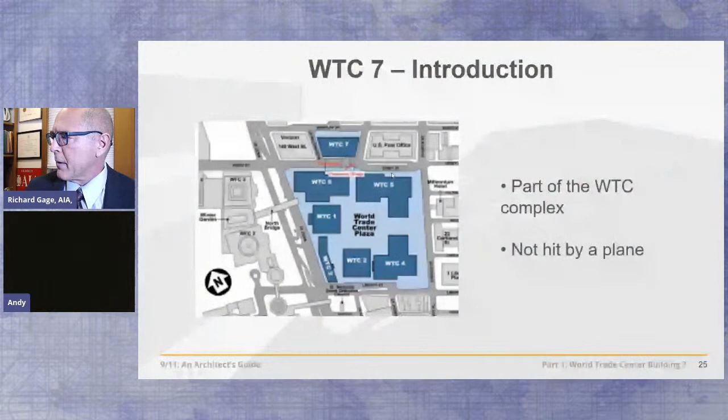The American Institute of Architects never even issued one bulletin on this incredible, historic, high-rise collapse that was unprecedented, as you'll see. It's 47 stories tall, easily the tallest building in most of our states. Emery Roth and Sons was the architect of record, the structural engineer Irwin Cantor. It was part of the World Trade Center complex, just outside the super block of the World Trade Center, but part of the World Trade Center nevertheless. It was about 300 feet north of the North Tower, and it was not hit by an airplane, and yet it came down, and we'll be looking at that quite a bit today.

So here it is standing just fine before the collapse of the Twin Towers, and then we have the collapse of the Twin Towers that morning, and you can see the building is still standing just fine. In fact, some of the debris did hit the building, and there were some fires that started, and those fires are said to be the cause of this building's collapse. So by official sources, we're going to challenge that hypothesis today. Some of the beams that were expelled from the North Tower did hit Building 7, but these are said to not have been a significant factor in the cause of this building's collapse. We'll find out what was.

First, let's look at the building collapse itself. Here we have the east penthouse falling first, as you see, and then about 6 seconds later, the entire building starts a symmetrical free fall collapse straight down into its own footprint.

Let's talk about the cause of this building's collapse from official sources. Here's Shyam Sunder of NIST, the National Institute of Standards and Technology: 'What we found was that uncontrolled building fires caused an extraordinary event. The collapse of World Trade Center 7 was primarily due to fire.'

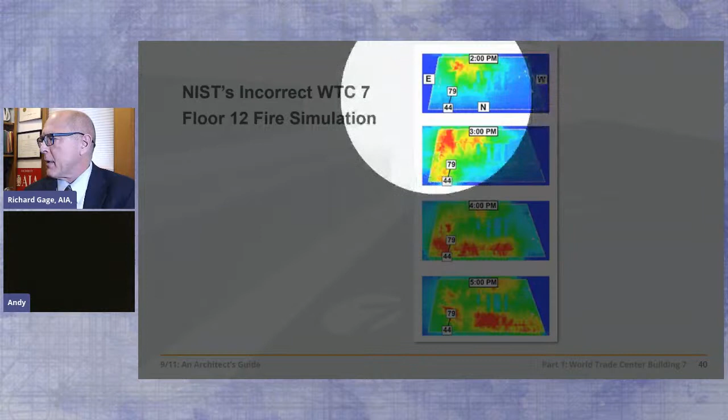So they levy an argument in favor of the fire collapse theory by creating their fire simulation. Let's look at it in some detail here. At 2 p.m., we have fires on the south side. They do move over to the east side at about 3 p.m. And then by 4 p.m., they're hovering around column 79.

Now, they also have them still hovering around 5 p.m. The collapse is at 5:20. So for over an hour and a half or so, they have these fires in the area of column 79. Now, that directly contradicts the understanding of fire protection engineers and NIST itself, which says such fires did not persist in any one location for more than about 20 or 30 minutes. Well, why then do they have those fires persisting in this location for an hour and a half between 3 and 5:20 p.m.? Because they need those fires to be persisting according to their collapse initiation theory.

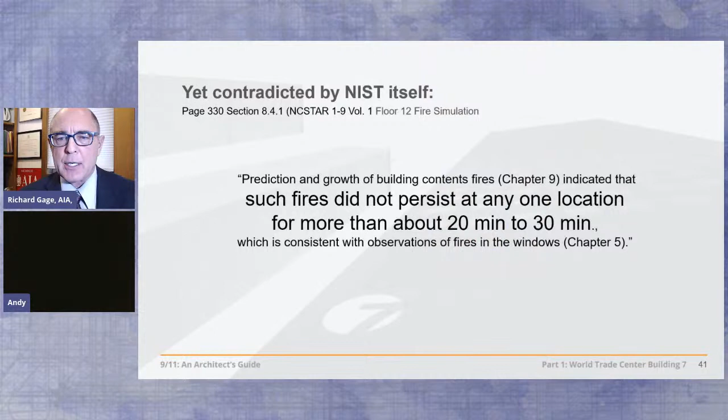But the photographs actually show that those fires were burned out on this floor, the 12th and 13th floor, which NIST focuses their collapse initiation theory on. Relative to those fires, they moved over, as you can see, toward the east—excuse me, from east to west. East on the left, west on the right.

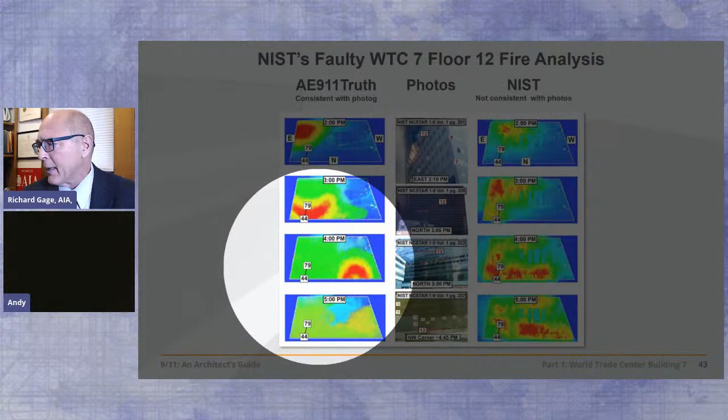So more accurate to the photographs that we see in the middle of the building, we have a fire simulation that we produced that shows on the east, those fires are burning about 2 p.m., and they move over about 3 p.m. to the northeast side, but they've moved on by 4 p.m. So for an hour and a half before the collapse of this building, those fires are gone from the column 79 area. And that's absolutely critical to understand, because that being true, NIST's collapse initiation theory, which focuses on what these fires actually did during that hour and a half, and specifically the few minutes prior to the collapse of that building, could never have happened.

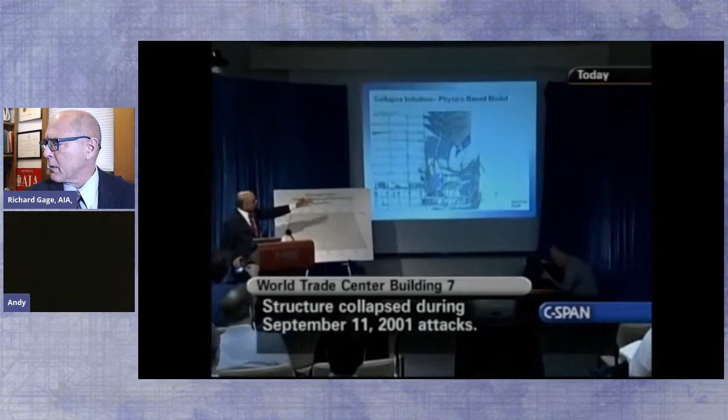Let's go back to Shyam Sunder of NIST. 'Our study has identified thermal expansion as a new phenomenon that can cause the collapse of a structure. For the first time, we have shown that fire can induce a progressive collapse. And you can see on the screen, the column at the very right is column 79. And that's the column that first buckles, causing the floors to come down, followed by a quick succession of failures of adjoining columns.' Well, that's the official story in a nutshell there.

Let's break it down. We have NIST saying that these beams expanded due to those fires, which they claim were active in this area for an hour and a half prior to the collapse of the building—expanding these beams, pushing this girder off of its seat on column 79, which causes floor 13 to fall on 12, 12 on 11, and so on for 9 floors, until the entire verticality of this column from floor 13 all the way up to the roof has collapsed due to unsupported length exceeding 9 floors. Well, none of that could have happened, for about a dozen reasons, which I'll tell you right now.

First, we have fireproofing on these beams. They could not have expanded. The fireproofing is 2-hour fire protection on these beams. That's a lot longer than any fire, even according to NIST, could have burned in this area. You can see the fire protection partially installed in this construction progress photo.

So second of all, they had to put all that fire, all that heat, 1600 degrees Fahrenheit, into that beam in a second and a half in their computer model in order to get it to expand this beam. That's unrealistic. Fires take longer than a second and a half to heat up, don't they? So that would have forced them to expand rather than sag, which, as you'll see in a moment, is what we would expect.

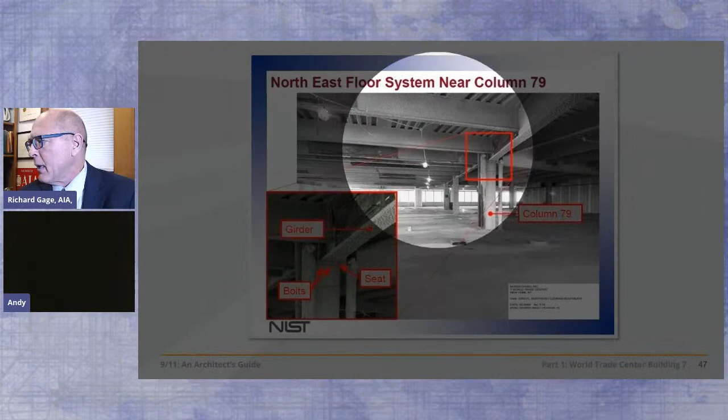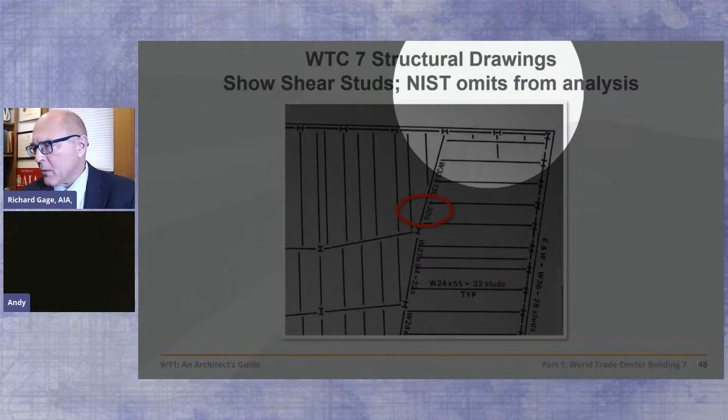And what tests have proven to show that beams do when they're heated up. Third, even if that beam could have expanded, pushing this girder off of its seat, the girder would not have been pushed off. Why? Because there are 30 shear studs tying that girder, as shown in the shop drawings, which means that the slab, the concrete slab up above it, is composite with that beam. That beam cannot slide with it being pinned every couple of feet or so to the concrete slab.

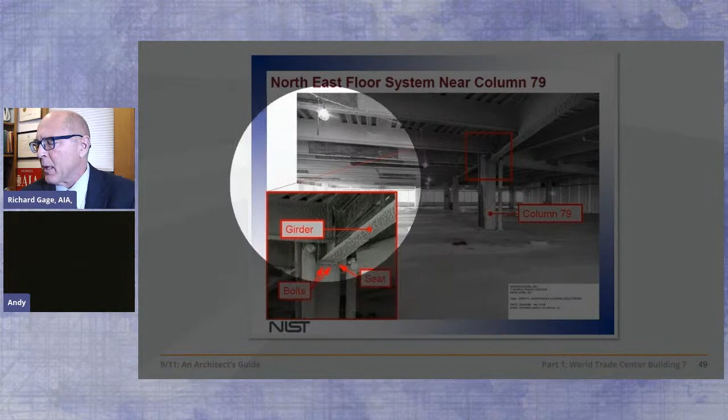So that girder never could have slid off of its seat. Third, even if those shear studs weren't there, the stiffeners that you see right in the center on top of the flange would... well, let's take a step back. This girder would have had to have been pushed all 12 inches off of its seat. But NIST says, no, that's not true. It only had to be pushed halfway off of its seat. Why? Because the flange, the bottom horizontal member, would have folded after the vertical member past the end of the 12-inch wide steel angle beam seat.

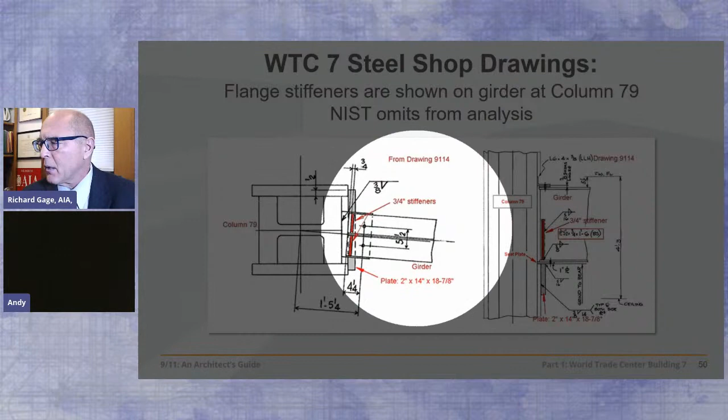So that's intuitive, except for one thing. They also had to omit, in order to get that to happen, the shop drawings, which show 3/4 inch steel stiffeners welded to support not only the web, the vertical section here shown in elevation, but the flange of that girder here shown in plan. So those stiffeners were there, and they would have kept that flange from ever folding.

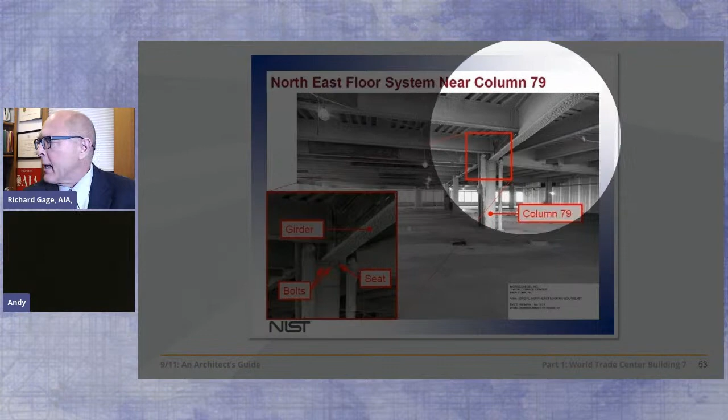But even if that were true, we have another problem for NIST. Let's say that stiffener wasn't a problem for NIST. Even so, you couldn't have had the second floor, the 13th floor, falling on the 12th here, even if that girder did fall off of its seat, because there's two other major girders that are intact on that column that would have kept that floor from ever falling.

But even if it did fall, we would have had a real problem for NIST also, because it only had 1/10 of the dynamic force that it needed to break the connections below on those three girders, which would have been 632,000 pounds, but there's only 60,000 pounds available. So NIST has done very sloppy work here, to say the least.

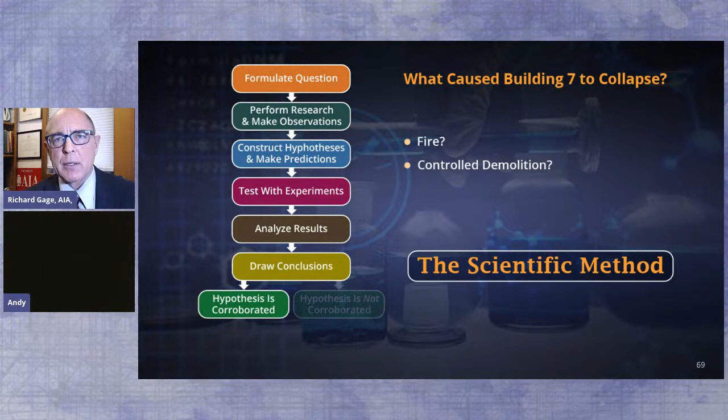Very reasonable. And we don't hide the computer data from the architects and engineers tasked with ensuring public safety, for instance. If the hypothesis is not corroborated, as we'll see today that it has not been by NIST — the hypothesis of fire bringing these buildings down — we go back and construct a new hypothesis, which is what we're doing today, until we have a hypothesis that is corroborated by the evidence.

So with that in mind, let's do some background research. Let's look at how buildings have come down historically. What are the forces that have been active? Well, fire's certainly one of them.

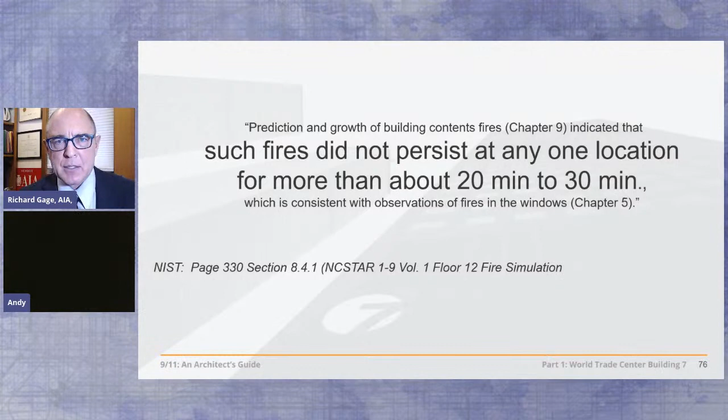Fire is an organic process. It's chaotic, with high temperatures. It burns out an area in roughly 20 minutes or so, moving on then, looking for fresh new combustibles, fuel sources. And as NIST even admitted in its report, the fires didn't persist for more than half an hour, which completely invalidates their hypothesis based on their fire simulation, which we showed.

Also, skyscrapers don't collapse. We haven't lost a steel frame fireproof skyscraper ever, and we've had 100 years of tests with many fires in them. But say in wood frame buildings, in which the structure itself is combustible, lower height wood frame buildings would fall over to the path of least resistance in halting stages, if you will. It's a chaotic process following the laws of entropy, increasing disintegration of order.

Let's see what happened. This was the largest test of its kind ever conducted. It showed how unprotected steel can be distorted, even by a normal office fire. But as is typical in steel buildings, the structural beams only slowly and progressively warped and sagged. There was no chance of a sudden collapse.

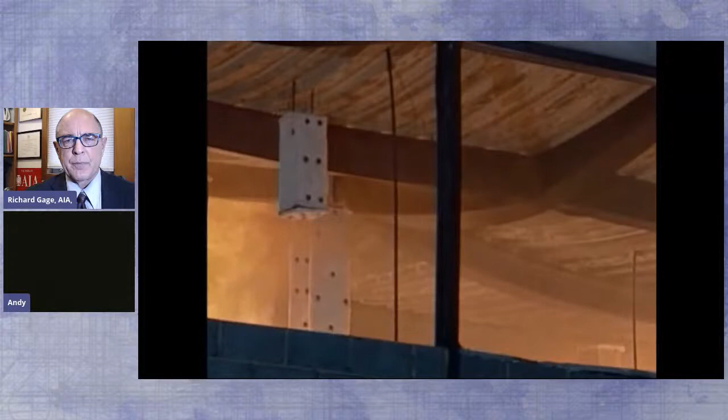In over 20 years, I have not seen, until recently, a protected steel structure that has collapsed in a fire. Until recently, of course, he's referring here to 9/11, when we had not 2, but 3 protected steel structures collapse due to essentially fire, and of course airplane impacts in the case of the Twin Towers, which we'll get to next week and the week following, on Thursdays during February at this same time, in this 3-part series, 9/11: An Architect's Guide.

But this building is inherently stable because of the steel construction. It's highly redundant, very robustly built. So even as you see here, the steel did not fail — it warped. We'd expect that in temperatures exceeding 1200 degrees Fahrenheit, but there's no failure. Certainly the connections did not fail.

So compare that to the connections failing in NIST's computer model, at a rate of 400 per second, from top to bottom throughout that building, in its 7-second collapse.

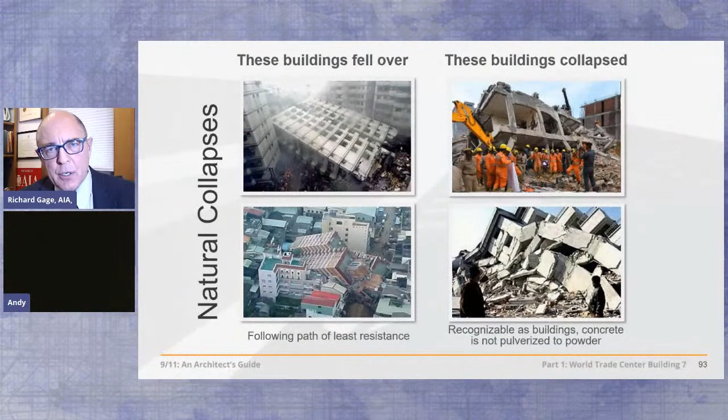And we'll compare these features to, alternatively, what happened to Building 7. But first, these buildings exploded.

We have thick, billowing, enormous pyroclastic-like clouds of pulverized building materials expanding rapidly in cauliflower-shaped forms due to the incredible heat from the ignition of very hot gases from the explosives. We have witnesses that hear sounds of explosions. They see flashes of light. If you have these features, you know darn well that you have explosions.

In fact, let's look at them. We have a sudden onset of destruction. Usually that's at the base of the structure. We have a straight down symmetrical collapse, usually, into the building's footprint.

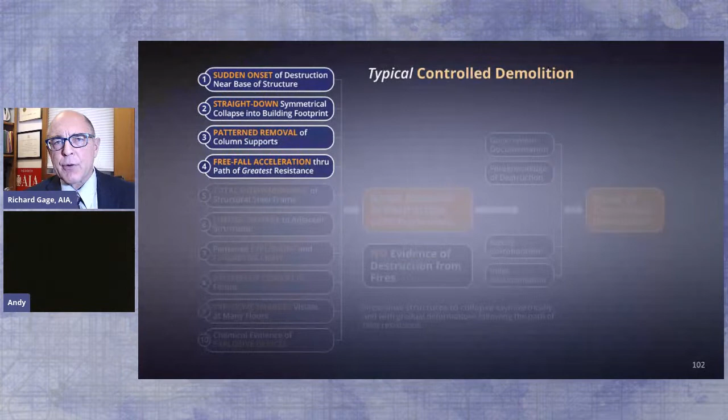We have a patterned, that's because we have a patterned removal of column supports. That's how you create the symmetry, resulting in a free fall or near free fall acceleration straight down through the path of greatest resistance, the thousands of tons of structure in the building. And therefore we have the total dismemberment of that structural steel frame as well.

We have limited damage to adjacent structures, feature number 6. That's one of the goals of controlled demolition. We have explosions that are heard by witnesses, flashes of light that are seen by them. We have broken up concrete floors or powdered concrete sometimes. Well, usually they're just broken up in normal controlled demolitions.

We'll see what happens in building 7. And we have explosive charges visible at many of the floors. These are squibs, isolated explosive ejections, clearly evidence of explosion. We have chemical evidence left behind in the residue of explosive devices. If you have these features, you can be darn sure that you have direct evidence of destruction with explosives.

Fire doesn't create any of these features, let alone all of them. Fires cause structures to collapse asymmetrically, as we talked about, and with gradual deformations following the path of least resistance. With additional circumstantial corroborative testimony and eyewitness evidence and eyewitness testimony, we have government documentation that can be very helpful in determining what might be an explosion.

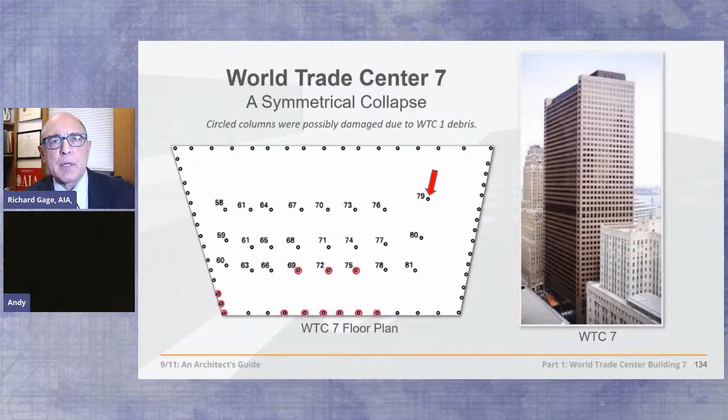Any deviation in that pattern, and the building will begin to tip and fall to the path of least resistance.

Do fires have that level of precision? These fires? We have to think critically. We can't just swallow what we're told by authorities anymore. Those days are done.

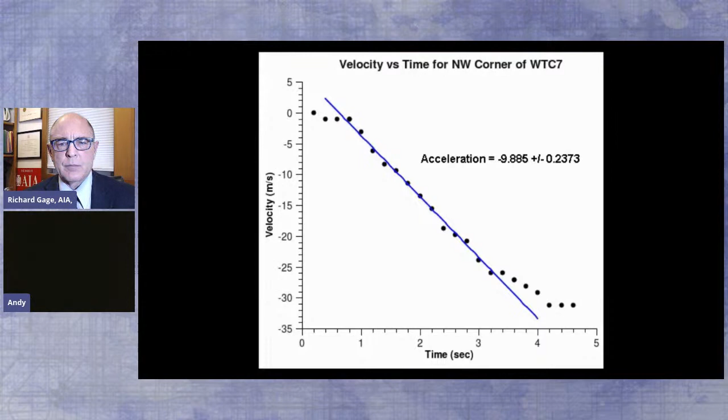Feature number 4: is there a free fall acceleration? Let's go to David Chandler, physics teacher, to learn about this. Just by watching it, anybody can see that Building 7 fell close to free fall. To measure it, I used software to track the corner of the building and compute a graph of downward velocity as a function of time. The graph had a long, straight section indicating constant acceleration.

Measuring the slope, I found the acceleration to be within 1% of the acceleration of gravity for the first 2.5 seconds. In other words, the building fell through its own structure with zero resistance. Zero resistance? This building had 40,000 tons of structural steel in its structural system, and that is intended to keep it from going anywhere. NIST is telling us that the building below it ceased to exist for the first few seconds of the collapse. Well, things in physics just don't cease to exist and cease to resist the forces that are on them.

The building didn't disappear, so the building can't fall for 100 feet at free fall speed. That's impossible. That's a violation of the fundamental law of physics that says for every action, there's an equal and opposite reaction.

And that's exhibited in the structural manuals themselves for steel structures. There's always, even after a column buckles -- you might call that breaking, but they don't actually break, they bend. Even after they bend, they never give up all of their resistance. They maintain 25% of their resistance even under the most extreme failures.

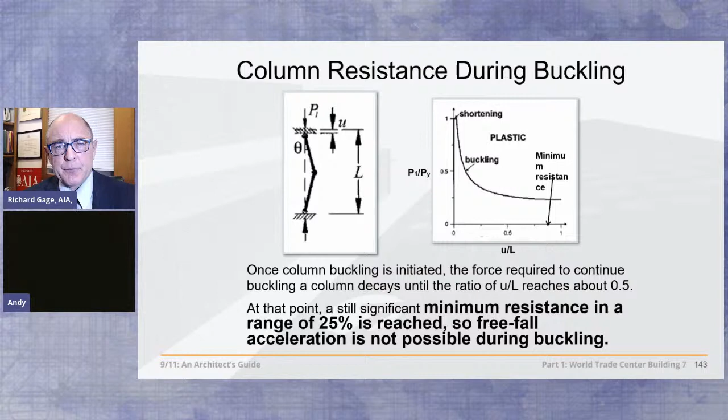And yet NIST acknowledges that this building came down at free fall, which means not one of those 80 columns gave any resistance. That is the definition of free fall, and it was in free fall for a third of this building's 7-second collapse.

Feature number 5: is there total dismemberment of the steel frame? We have a 47-story skyscraper, which is a moment-resisting steel frame structure where the columns and beams are very rigidly welded to each other, so they might bend a little bit, but they don't break.

But what you have here is a 47-story moment-resisting skyscraper that's been disintegrated to 6 stories -- a house of cards, basically. What happened to all those column and beam connections? Thousands of them. Remember, buildings that fall by natural forces don't have their columns and beams severed from one another. The building is recognizable as a building.

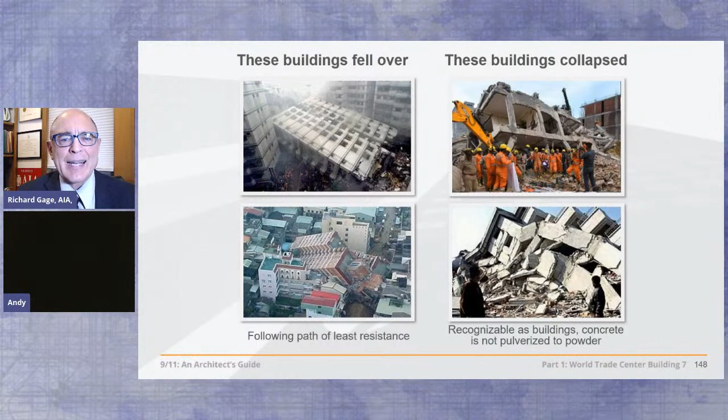Is there limited damage to adjacent structures? Well, yeah, pretty limited damage. The center of this building is in the center of the pile. There's minor damage to the adjacent buildings, though.

Were there sounds of explosions heard by witnesses? Let's listen to NIST about this one first: 'We did not find any evidence that explosives were used in the collapse of Building 7. We ran detailed computer simulations of blast scenarios. This size blast would have produced an incredibly loud sound that was not recorded on videos of the collapse, nor reported by witnesses.' But let's see what sounds those witnesses nearby did hear -- witnesses that NIST did not choose to interview.

Like this witness, the afternoon of 9/11, right after the building collapse, interviewed on 1010 WINS Radio in New York: 'We were watching the building because it was on fire. The bottom floors of the building were on fire, and we heard this sound that sounded like a clap of thunder. We turned around and we were shocked to see the building -- it looked like there was a shock wave ripping through the building, and the windows all busted out, and it was horrifying. And then about a second later, the bottom floor caves out.' A shock wave ripping through the building, a sound like a clap of thunder, windows busting out, and then the building coming down.

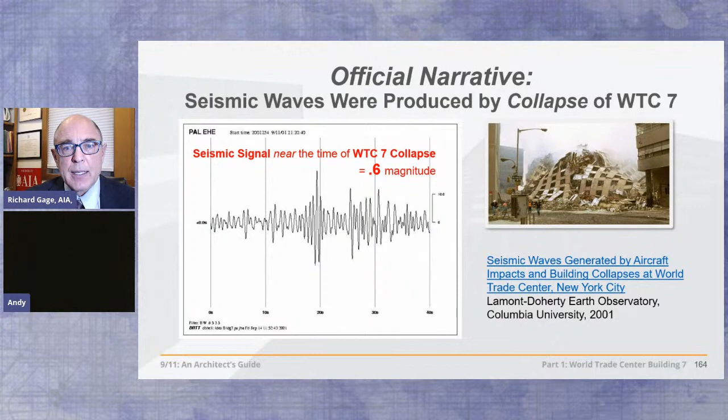Well, the official narrative tells us that the seismic waves that were recorded were a result of the collapse of Building 7. Is that true? Let's look carefully here. We have the seismic signal at 5:20 and 42 seconds, the peak seismic signal here. But the start of the building collapse doesn't happen until 10 seconds later. So how can the building collapse cause a seismic signal 10 seconds earlier?

Well, NIST has a reason for this: 'This is likely due to the falling of debris from the collapse.' What they mean is the interior of the building, which they say did collapse about 10 seconds earlier. Well, we found that wasn't true. We found that the east penthouse collapses 7 seconds earlier, but there's no breaking of windows below, so it appears to be an isolated event, and that's proven, as we'll talk about. And the interior collapse did not proceed until only a half a second prior to the overall collapse. We saw that also. So NIST is caught lying yet again. The fraud never ends with this agency.

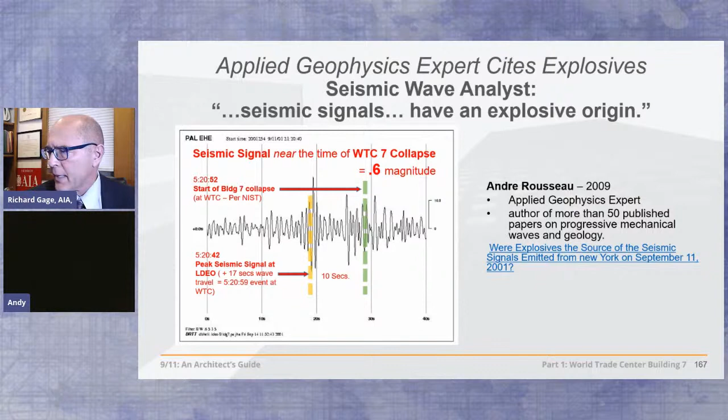This cover-up, which is all you can call NIST's work here, is further undermined by applied geophysics expert Andre Rousseau in 2009 and 2012. What does he say? According to the seismic data, the bell-like form points to an impulsive source of energy, not percussion on the ground due to the falling of debris. Seismic waves are only created by brief impulses, low frequencies. So these seismic signals undeniably have an explosive origin.

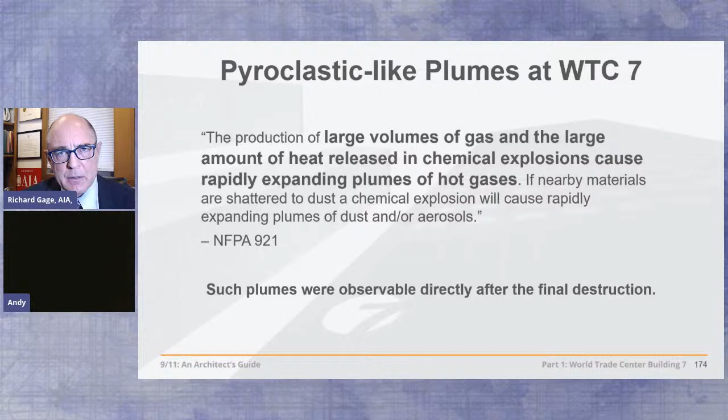Well, let's go on. Feature number 8: the pyroclastic-like clouds, in other words, incredible heat produced here in this collapse. Let's go to the National Fire Protection Association Guide 921 for fire and explosion investigations. NIST actually had a hand in creating this document, so they should have been adept at following it, but they didn't. What does it say? Look for large volumes of gas and the large amount of heat released in chemical explosions, causing rapidly expanding plumes of hot gases. Well, that's exactly what we have, racing in every direction away from the collapse of Building 7 at 35 miles an hour.

Rapidly expanding plumes in cauliflower-shaped formations. Is there enough heat to create this extremely rapid expansion in these small fires, which were probably extinguished during the collapse of the building itself? No, we're looking for something much greater in terms of heat. Something on the order of this.

Well, how do we get temperatures that high on the surface? These are temperatures associated with the extreme hottest office fires. But there's no office fire on the surface. So what are they measuring? They're measuring something that surely must have been much hotter, deeper down in the bottom of the pile, which, when radiating and diffusing that heat at the surface of the pile, cooled off to 1,340 degrees. Let's look for evidence of what that could have been.

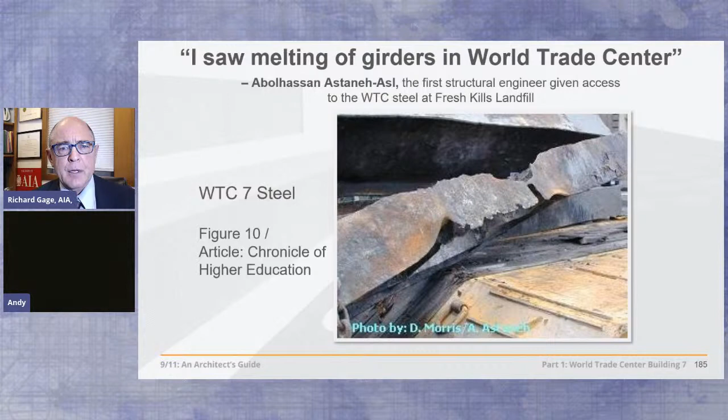But he doesn't know how it could have been done. He says steel members in the debris pile, a different engineer, fire protection engineer Jonathan Barnett, steel members in the debris pile that appear to have been partly evaporated in extraordinarily high temperatures. Now, there's a problem here. Steel doesn't evaporate until about 4,000 degrees Fahrenheit.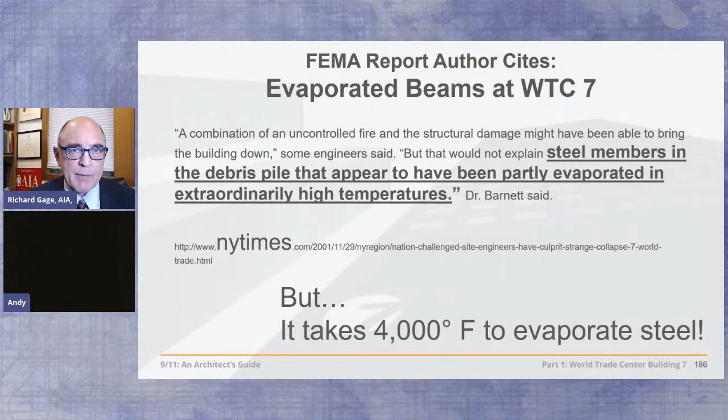They document rapid oxidation, sulfidation, liquid iron—that's molten iron—sulfur, hot corrosion attack on the steel.

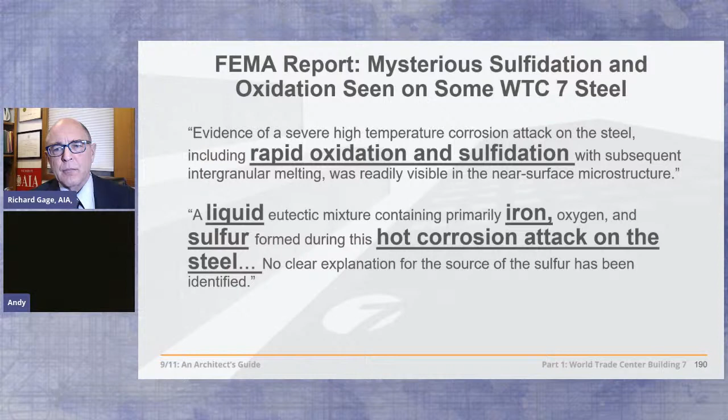The New York Times says this is perhaps the deepest mystery uncovered in the investigation. And yet, this information and report was completely omitted from the final report when NIST took over the investigation from FEMA. The entire metallurgical report abandoned.

NIST says, well, we couldn't test the steel. No steel has been identified from Building 7, but you just saw two pieces that were, right? You saw the reports that were based on one of those pieces. The report: no steel recovered from the site. They just want this to go away, this problem which they cannot explain, not even remotely possible given the official account of this event.

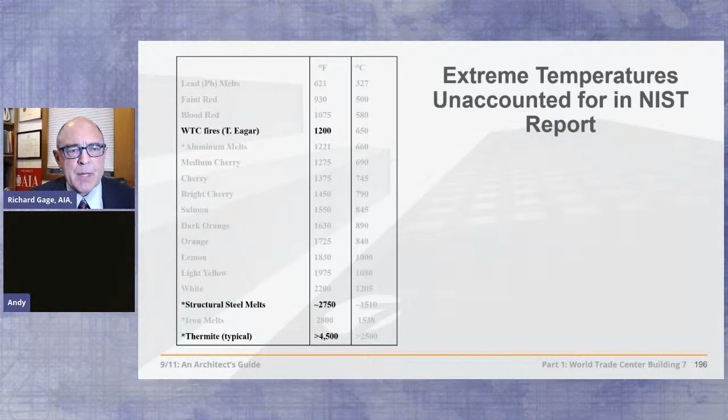Well, the fires might have been 1,200 degrees, according to Thomas Eagar, Fahrenheit. Structural steel doesn't even melt until almost 2,800 degrees Fahrenheit. What can create the difference between office fires and steel melting or evaporating? Well, we'll be looking at thermite, a possible suspect, in a moment.

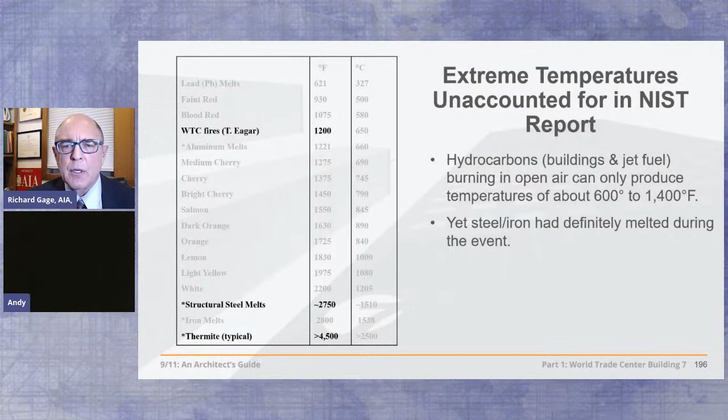But even jet fuel doesn't even burn, and no plane hit this building, but we get to this when we get to the Twin Towers. Jet fuel only burns 600 degrees Fahrenheit, and some people say 1,400 degrees for hydrocarbons in buildings. So collectively, 600 to 1,400 degrees.

So what caused all of this steel to melt? Let's look at thermite. And what is thermite anyway? An incendiary used by the military, thermite is a compound of iron oxide and aluminum, which when ignited sustains an extreme heat reaction, creating molten iron. In just 2 seconds, thermite can reach temperatures over 4,500 degrees Fahrenheit, quite enough to liquefy steel.

We know that open-air fires cannot burn hot enough to melt steel, but metal had melted at the base of the towers.

Appendix C of the FEMA report describes sulfur residues on the World Trade Center steel. The New York Times called this the deepest mystery of all. Sulfur slightly lowers the melting point of iron, and iron oxide and iron sulfide had formed on the surface of the structural steel. Sulfur used with thermite is called thermate, producing even faster results.

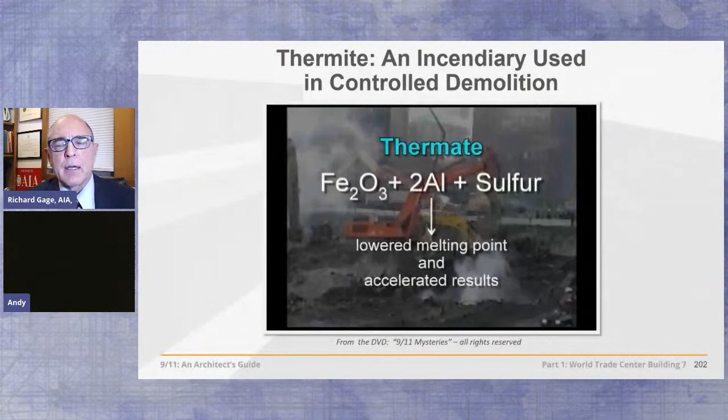Well, maybe we're getting somewhere here, because if thermite were used, it would explain the extreme heat, 4,000 degrees Fahrenheit. It would also explain the molten iron, elemental iron. We haven't used iron in our structural skyscrapers for 100 years or so. And we'll find lots of evidence for iron, elemental iron, molten elemental iron coming up in a moment. But it would also explain the presence of sulfur, which you just saw was added to thermite to become thermate, much more effective at cutting through steel.

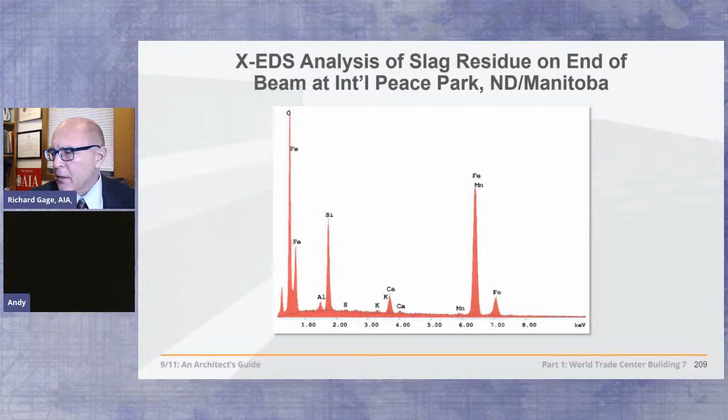So he does X-ray energy dispersive spectroscopy of this piece of slag from the end of the steel beam. And what does he find? Well, the ingredients of ignited thermite, which is found in the iron, elemental iron, and the aluminum oxide here, but also sulfur. So sulfur is confirmed here, which means thermate, along with potassium, manganese. We'll get to the importance of that in a moment.

But let's look and see what official sources have found in the World Trade Center dust, in this case, the U.S. Geological Survey, who analyzed the dust very meticulously in 2005, producing their report, Particle Atlas of the World Trade Center dust, in which they find billions of previously molten iron microspheres. Now that's a mouthful. Let's unpack it. First of all, they're spherical, which means they were previously molten.

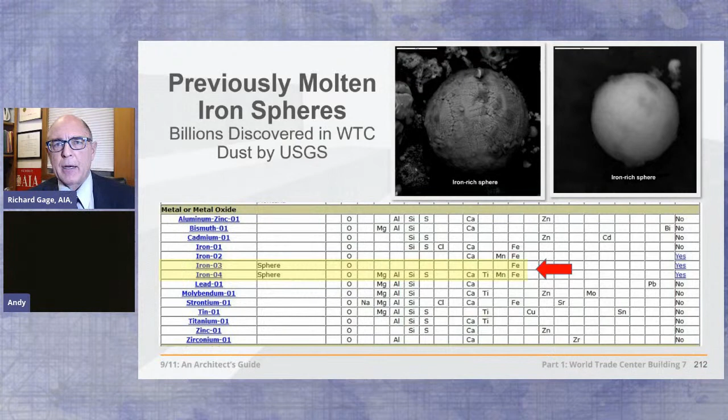They're about 1/16 of an inch long, the largest of them. Most of them are almost invisible to the human eye, but they're in all the samples. They're iron, not steel. Elemental iron. Again, where did the iron come from? We haven't built skyscrapers out of elemental iron for 100 years, as I mentioned. They comprise up to 6% of the dust in these samples, amounting by extrapolation up to 4 tons altogether. 4 tons of previously molten iron microspheres. They're not iron particles that are found in common office building dust.

R.J. Lee Group, an environmental engineering group, also did their own analysis, and they find that these are formed during the event. They don't know where they came from. Neither does the USGS. They simply document that they're there and make a conclusion that they're formed during the event, not before by the welders that welded the steel, not after by the iron workers taking the steel apart, but during the event. But they don't know how. There are so many of them that they're used as a signature to distinguish World Trade Center dust from common office building dust. Well, where would they come from?

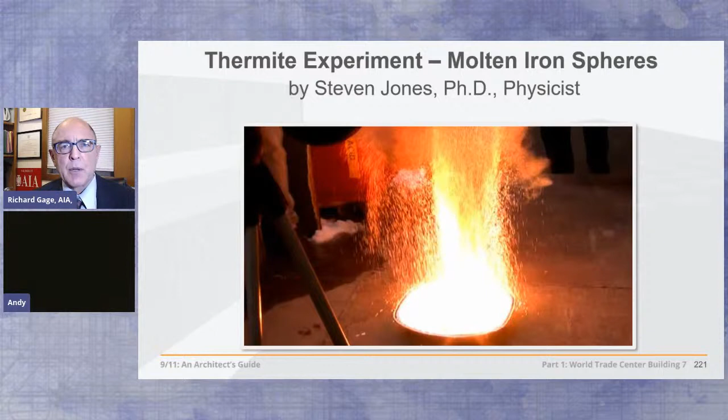Let's put together a thermite experiment and see if thermite produces them. Here's a small experiment produced by Steven Jones, formerly a professor with Brigham Young University, a nuclear scientist. He gets some of this material from eBay, I think, and sets it on fire, producing thousands and thousands of what we'd think were sparks, but which he knew better - actually these are molten iron droplets.

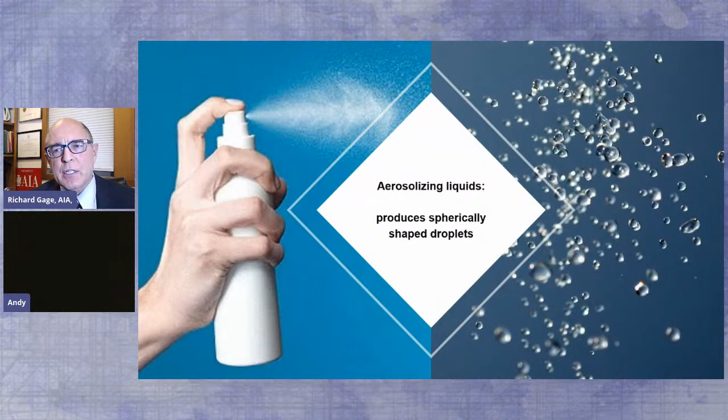Why do we get spherical droplets from molten materials? Well, when a liquid is aerosolized, it forms itself by surface tension into droplets. Could that be what explains the tops of these toasted cars around the World Trade Center - liquid molten iron droplets falling everywhere in this very high heat event? What other rational explanation can we find that explains this phenomena?

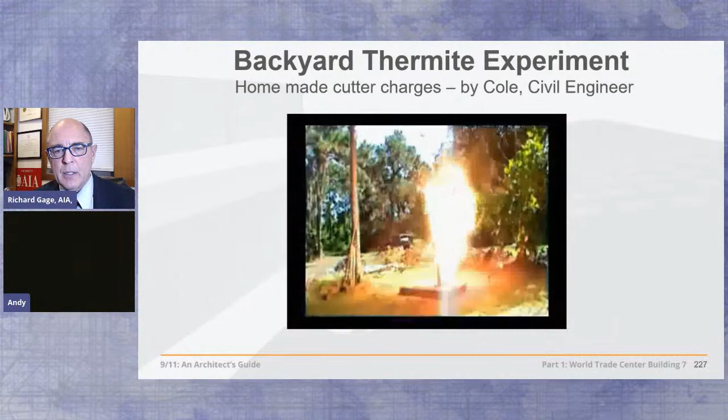Well, you can also produce this phenomenon in your own backyard with shaped cutter charges, and break and take down steel structures in the process, like Jonathan Cole did - a civil engineer - cutting most of the time in his experiments cleanly through the steel beam.

Well, you don't have to make your own cutter charges, you can get them - they've been invented. In fact, thermite-based cutter charges before 9/11, projecting thermite charge particle streams, molten iron, on the order of hundreds of milliseconds, much more effective at cutting through much greater thicknesses of steel structural members - which is very, very helpful, but very expensive.

Well, why would the perpetrators of 9/11 choose to use thermite-based cutter charges rather than high-energy explosives like C4 and RDX? Well, those provide very loud bangs and very bright flashes - audio and visual signatures that surely the perpetrators would have wanted to avoid. It'd be an obvious controlled demolition then. Well, it was pretty obvious, as you're seeing in these webinars, but perhaps this choice was hoping to be less obvious.

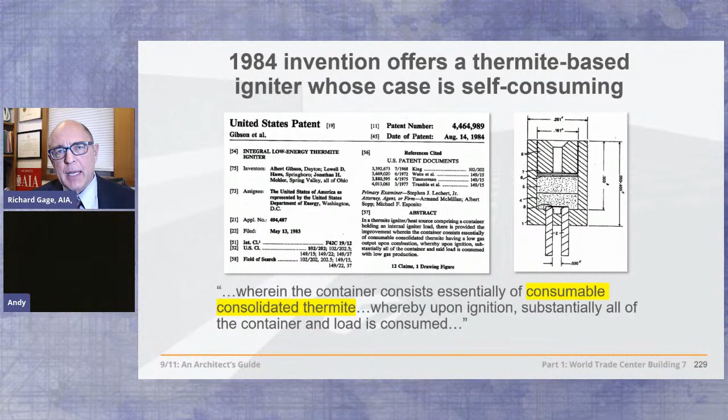Fascinating, huh? Well, is there any evidence of unignited thermite? That was all evidence of ignited thermite in the World Trade Center. How about unignited? What was found in the dust by this team of international scientists led by Niels Harrit in Copenhagen? They find in their independently collected samples - 7 or 8 of them - like this one in Janette MacKinlay's apartment across the street from the South Tower on Liberty Street. Her windows blew in from the explosions that we'll get into next week and the week following in this 3-part series, filling her apartment full of this toxic dust.

And she was an artist, so she used this material in her therapy, actually, with her artwork, because it was so traumatic - she was in her apartment when this happened. And she paid for that decision with her life. She succumbed to brain cancer. But hers is one of these samples.

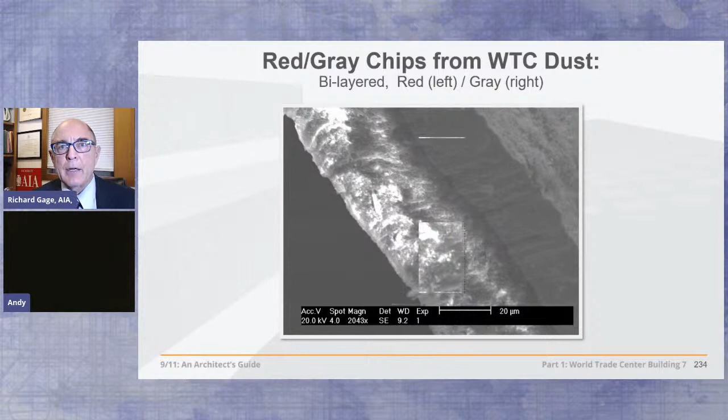All the samples the team of scientists find these curious red-gray chips, red on one side, gray on the other. They thought they were paint, but they're attracted to a magnet, so they have this high iron content, right? They get real curious and do an X-ray energy dispersive spectroscopy and find, yet again, the ingredients of thermite, unignited: iron oxide and aluminum.

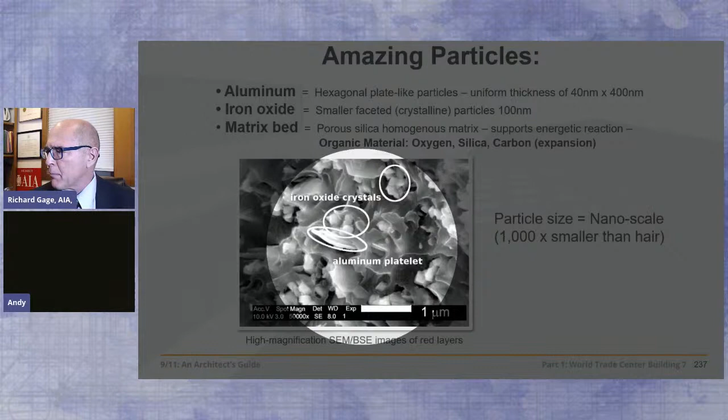And they get real curious now, zoom in 50,000 times with a electron microscope, and they find iron oxide crystals and aluminum platelets - the ingredients of thermite - at 1,000 times smaller particle size than the diameter of a human hair. These are at a nanoscale. These are nano-engineered materials. They're set in a matrix, a bed of organic material: oxygen, silica, carbon. These are the materials that are used in TNT for expansion.

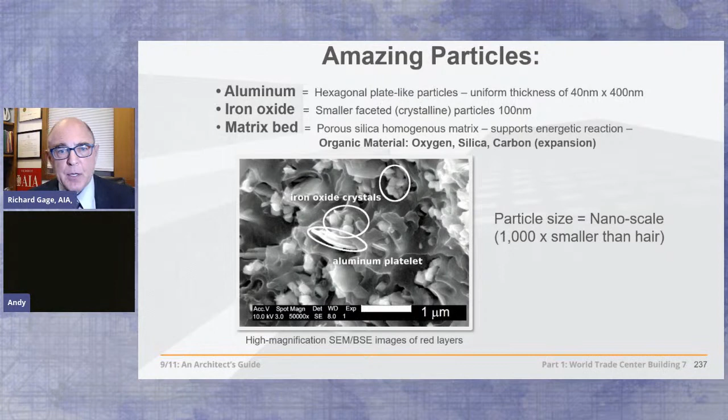Showing that they're energetic materials like thermite, not normal materials - paint doesn't do this. When they ignite, they produce what? Molten iron microspheres.

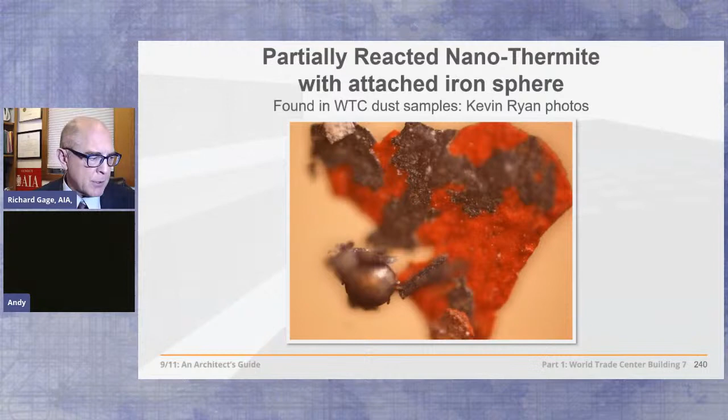With the same chemical signature - iron, aluminum, etc. - as the molten iron microspheres found in the World Trade Center dust by all of these other agencies. So we know where those iron microspheres came from - they came from these red-gray chips. As if we didn't know, because they're found attached to these partially ignited red-gray chips, as you see here and here. So you see, we have an internally consistent, self-corroborating set of repeatable experimental data that could be used very effectively in a court of law to prosecute the real perpetrators of 9/11.

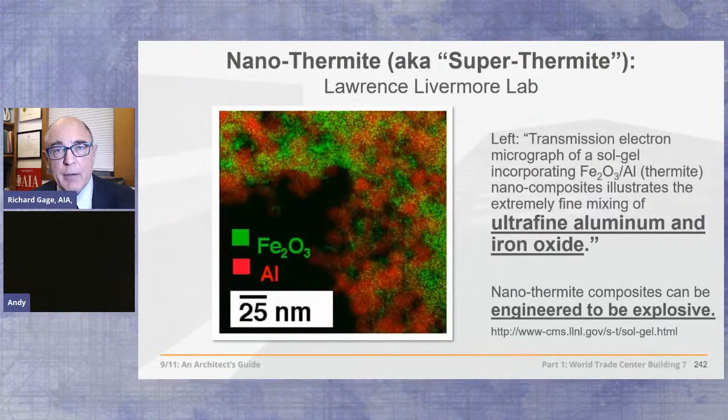See, this stuff is not made in a cave in Afghanistan - it is made only in the most advanced defense contracting laboratories. When you get these materials down in size at the nanoscale, the surface volume increases exponentially, so you have an incendiary engineered to become more explosive due to the very fast chemical reaction.

It's made not in a garage. Don't try this at home.

So we know where to find the people who make this material, where there's the political will to pursue it, which we've been waiting for since 2009 when this paper came out - a 25-page peer-reviewed paper in the Bentham Open Chemical Physics Journal. The red layer that's been discovered is active, unreacted thermitic material incorporating nanotechnology. It's a highly energetic pyrotechnic or explosive material, concludes this team of 9 international researchers.

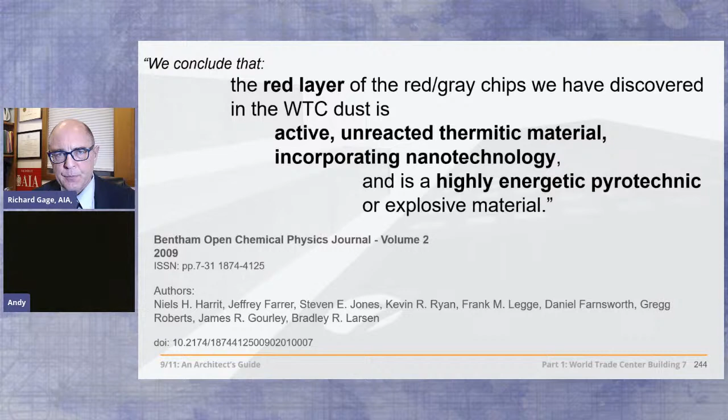That is evidence added to all the evidence we've been looking at - direct evidence of destruction with explosives. Fire doesn't create any of these features, let alone all of them. The fires cause less robust structures to collapse, but again, they do so asymmetrically with gradual deformation following the path of least resistance.

Why haven't we had a collapse of a protected steel frame skyscraper by fire ever? Well, one reason is the steel conducts that heat away, so the steel never gets this hot because it's so dense. So it never reaches its 1200 degree Fahrenheit temperature, at which steel loses half of its holding capability and can begin to bend.

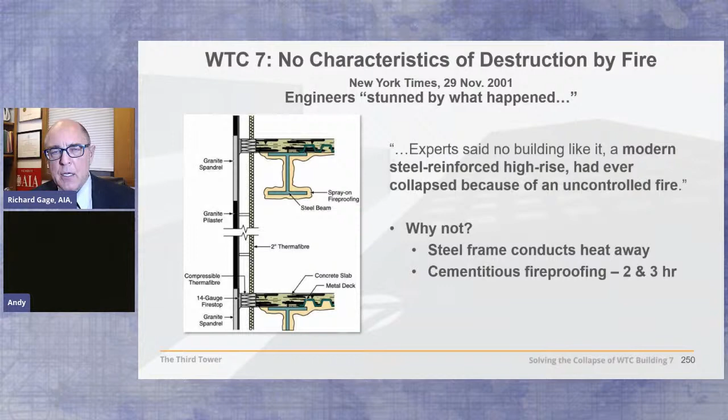But to keep that from ever happening, we coat steel with cementitious fireproofing these days - 2 hours on the beams and 3 hours on the columns, to give not only the occupants time to get out, but the firefighters time to put out the fire altogether. But even so, 20 or 30 minutes is the maximum time a fire can even last in these buildings. This is 4 to 6 times as much fireproofing as is ever needed.

We also keep the contractors from building these buildings out of combustible materials like wood, and we keep the tenants from bringing in materials that exceed certain flammability standards. So we also, just to keep any fire from ever becoming a problem, we sprinkler these buildings.

So there's a level of redundancy here that is absolutely exceptional, and that's the reason we have not lost one of these steel frame protected structures in the history of thousands of these buildings.

So the official reports began with FEMA, which had limited funding - $600,000, really a joke. And even so, their efforts were hampered. They didn't have access to the blueprints of the buildings, adequate access to the site, or access to the public for photographs and videos. It was a joke, documented by the New York Times.

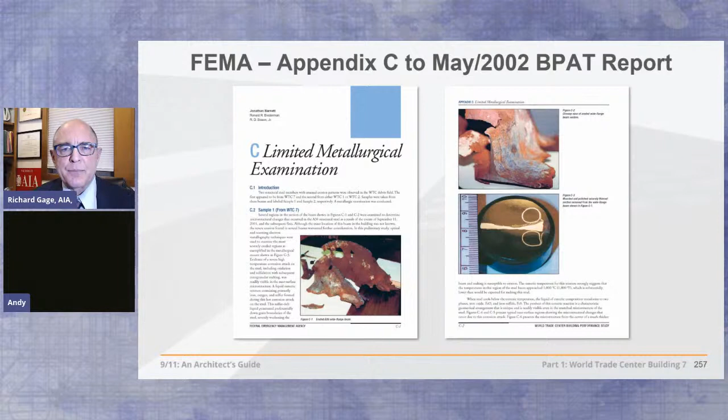And what did they do with the FEMA report? Again, they 86'd it - they omitted it from their final report altogether. And in that report from FEMA, they acknowledged at least that further research, investigation, and analysis are needed to resolve this issue of how the building collapsed.

And surely in the most puzzling, largest structural failures in history, we would have the preservation of the evidence - the steel, key evidence. But no. Starting just 2 weeks after 9/11, 400 truckloads a day were carted out of the World Trade Center, beginning with Building 7, and sent to China for recycling before investigators could get their hands on it and do an adequate investigation. This is the destruction of evidence in a crime scene.

They called it an act of war, so they weren't bound, apparently, by the rules of crime scene investigation. Prompting Bill Manning, editor-in-chief of Fire Engineering magazine, to cry out: crucial evidence that could answer many questions is on the slow boat to China, showing an astounding ignorance of government officials to the value of a thorough scientific investigation. The destruction and removal of evidence must stop immediately.

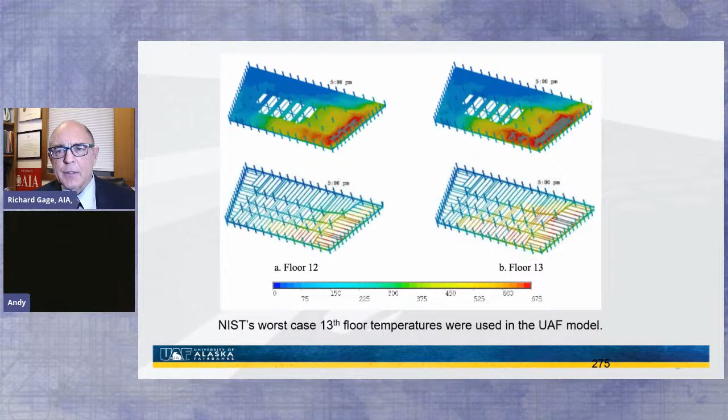So he models it very carefully, but first finding what the problem is. No other tall steel frame building had ever failed due to fire, he said. Ensuring public safety is really important. The failure mechanism must be understood.

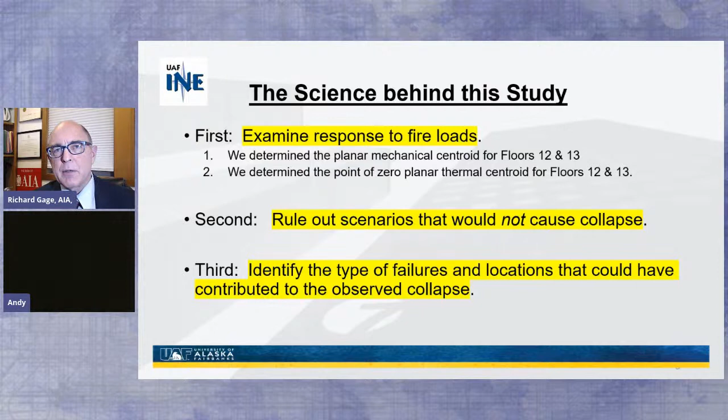He and his team of PhD researchers start first by examining the response to the fire loads, the results of concrete and steel when they're heated with fires. Second, rule out scenarios that could not cause the collapse. And third, identify the types of failures and locations that could have contributed to the observed collapse.

They used all the same input data that NIST did, finding in the process that NIST falsified much of their input data, but nevertheless used in his analysis the same input data so that they could compare apples to apples.

So even with the flawed input data, in seeking to simulate structural responses due to the fires in floors 13 and below, as NIST did, they examined the NIST collapse initiation hypothesis, and then simulated numerous fire scenarios to identify what could lead to the collapse.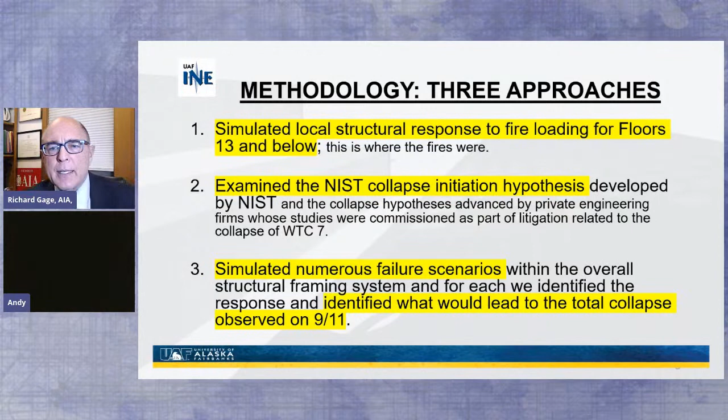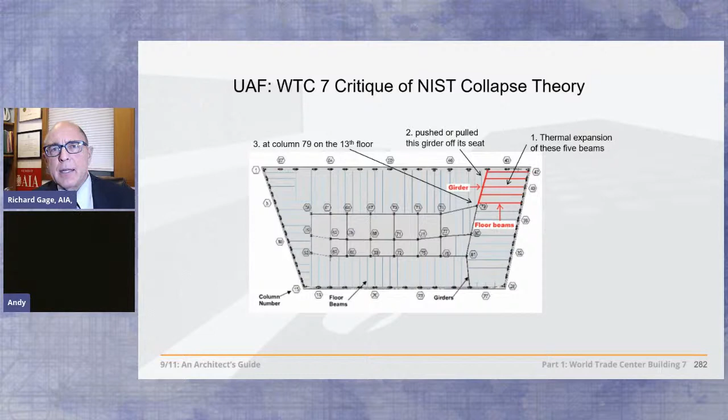First putting all of this in AutoCAD, then advancing this in two separate parallel paths, one with the Abaqus software, very sophisticated software, and one with SAP 2000. They study the area that NIST claimed to be the cause of the initiation of the collapse, as we talked about.

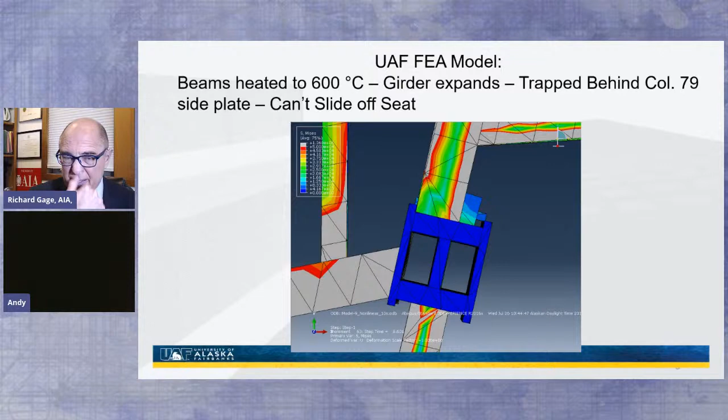They found that the stiffeners were omitted by NIST. They find that the girder couldn't even have slid off its seat, which we didn't mention before, because it would have been trapped by the side plate welded onto the side of this wide flange beam after that girder expanded due to the same heat that was expanding the long span beams in there.

And the UAF finds that NIST did ignore the shear studs that the shop drawings show were on the structure, and the steel beam stiffeners, as we mentioned. They also find that there's 10 times less force in the dynamic impact of the 13th floor onto the 12th. So there couldn't have been a progressive failure, as NIST claims, at all.

They also found that the movement of the steel and concrete in this area as a result of the fires would have moved outward, pushing the exterior wall out. But NIST made this exterior wall infinitely stiff, so it couldn't move out, which is, again, fraudulent. So they got the movement forced to the inside, NIST did, as a result.

So the key findings in this 4-year, $300,000 study is that NIST overestimated the exterior wall rigidity. Those exterior walls were more flexible. And they found that the movement was in the opposite direction from what NIST claimed, as we just discussed.

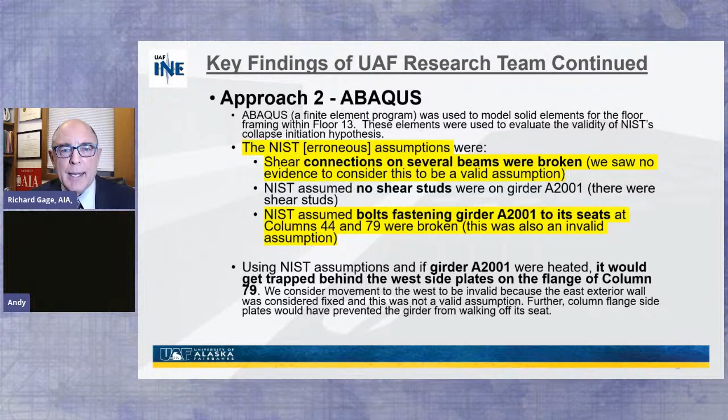They found that the shear connections were not broken, as NIST claims, from the long span steel beams up to the concrete floor. It's a composite connection, and the shear studs wouldn't have been broken. Neither would the bolts that fastened girder A2001 to its seat. They wouldn't have been broken. In other words, no collapse, just on the basis of this.

They found that columns 79, 80, and 81 did not fail under the same conditions that NIST modeled them. They found that if they did fail, because they modeled that also, it could lead to failure.

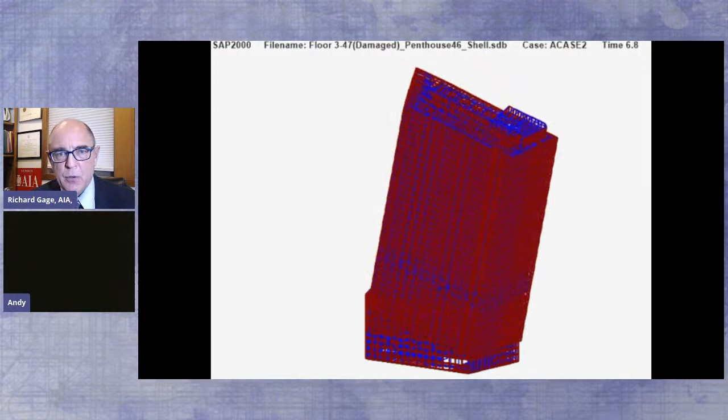But then the building would tip, as you see here. This is what would have happened in the UAF model if they forced those columns that NIST says failed to fail. The building, of course, tips, which is what you'd expect because of the asymmetry of the building and the asymmetry of the failed columns relative to all the other columns.

What did they find? That the collapse of this building was a global failure, not a progressive collapse involving the sequential failure of columns. When NIST models it, in order to get the failure to occur like the videos show, we have to have a global failure. In other words, it didn't experience a progressive collapse, but a global collapse caused by the near simultaneous failure of all of its columns. Fire did not cause the collapse of Building 7, therefore.

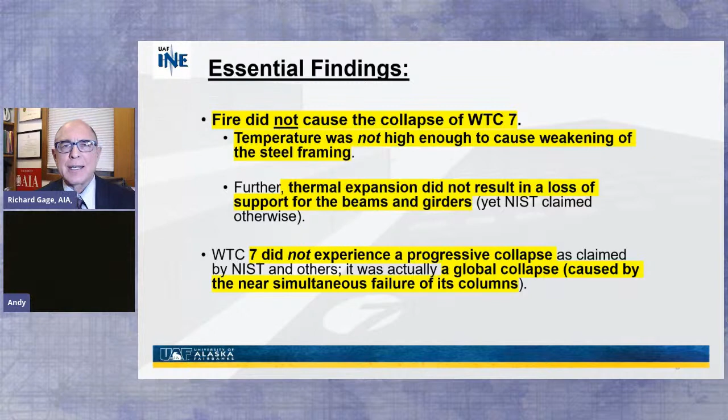Do we have foreknowledge of this building's collapse? Because if it was a planned event, people would know about it. Let's look at this interesting predicament that Chief Hayden finds himself in. He goes to this engineer and says, if we allow it to burn, could we anticipate a collapse? How soon? In its current state, you have about 5 hours. What? For the first time in history, a steel frame building has never collapsed due to fire. But this one's going to collapse in 5 hours due to those small fires that you saw. Can we have the name of this engineer? No, he's anonymous. The prediction could only have been made with foreknowledge.

Like these mysterious construction workers walking away from Building 7, hearing an explosion over their shoulder, looking back at the building, and then looking straight into the CNN camera, saying this.

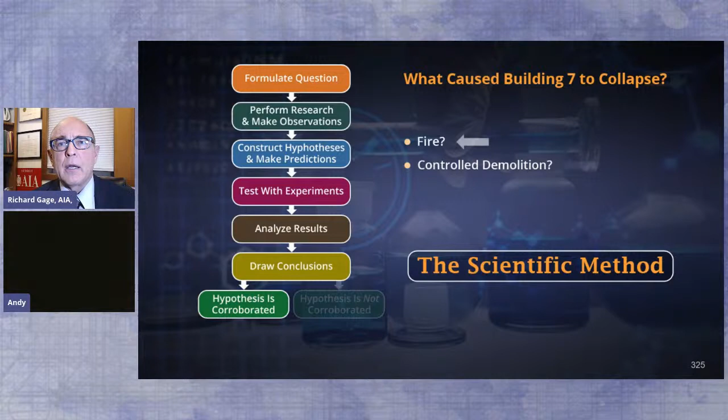That's a very important question, because if you're convinced, like we are, that the evidence shows with these 10 key characteristic features direct evidence of explosives, and fire not creating any of these features, let alone all of them, and with additional circumstantial corroborative testimony that you find this proof of controlled demolition, then you have a huge problem, like I did when I became aware of this evidence in 2006.

You might just find yourself on a mission to wake people up, because look at what happened after 9/11. The world changed. A $6.5 trillion global war on terror.

Our civil liberties under attack by the Patriot Act, the Military Commissions Act of 2012, and other executive orders and so forth. Any of us can be arrested without a right to a lawyer, a trial, a jury. We can be held indefinitely. We can even be tortured and assassinated. That was all legal. I say legal. It's unconstitutional, certainly, but that's what they're doing because of 9/11.

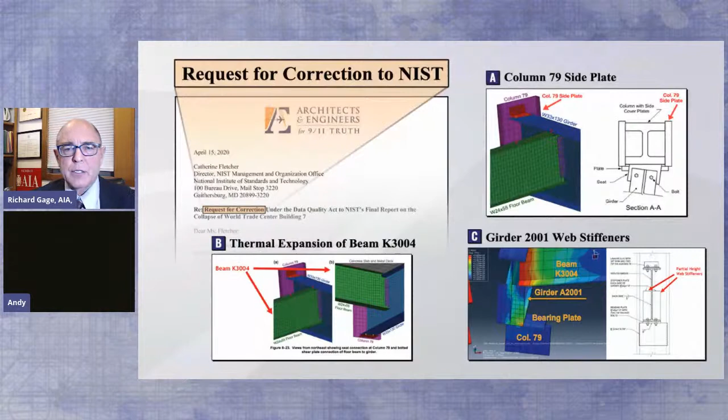And know that we have submitted a request for correction to NIST, citing 8 of the key fraudulent points we've been discussing so many of. They've written back saying, no thank you, we like what we did. They didn't give detailed responses that answered any of the questions we raised. So we have now appealed that decision, and we're anticipating imminent answers from that.

And we have something we put together here at AE911Truth that will be the perfect tip of the spear. Andy, you want to talk about this one?

That's right, it's the Bobby McIlvaine World Trade Center Investigation Act. It's named after Bobby McIlvaine, who lost his life entering the North Tower lobby on September 11th. He was killed by an explosion, according to the coroner that his father, Bob McIlvaine, spoke to.

So right there, we have a chance to talk to our congressman about some aspect of the official story that doesn't measure up, or a detail that doesn't match the official story. And there are so many of them that Richard has outlined. What this would do is create a select committee. It can be passed in either House of Congress to look into the evidence of controlled demolition on September 11th. It's written so that they actually have to look into this specific evidence and give it a fair day in Congress.

But as our very battle-hardened audience knows at this point, Congress doesn't do anything unless they hear from a lot of their constituents. So that's why you have to get involved. Even if you've reached out to members of Congress before, the key is not having one meeting, it's having several, letting them know that you're out there and that your coalition is building. So you've got to be that activist and keep in constant communication with them.

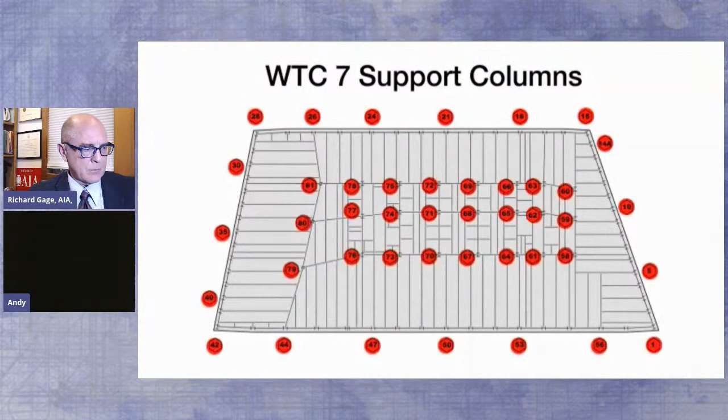Building number 7 descended in free fall for the first 100 feet, which means there was absolutely no resistance to the descent whatsoever. So all of the columns really needed to be severed at the same time. The symmetry is the smoking gun.

NIST has admitted it went into free fall for 8 stories. You don't need to be an engineer or an architect to see what happened to those buildings.

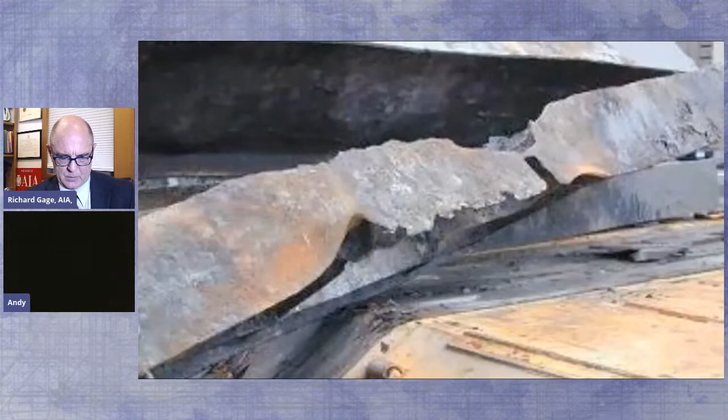There were these iron microspheres present in all of the dust samples. They needed to have been formed in extremely high temperatures. All the characteristics of the microspheres, along with what I see in the attack of the beams that were actually found, tell me that thermite was involved.

In the dust, what we have found is a modern version of thermite, which we call nanothermite.

NIST concedes that they found no evidence for explosives. So then we asked them, well, did you look? And they said, no, we did not look for explosives or residues of explosives. And in fact, the evidence is overwhelming that these red-gray chips are very high-temperature incendiaries.

And we have watched as scientific integrity has been undermined and scientific research politicized in an effort to advance predetermined ideological agendas. If this is a crime, I think everybody agrees it's a crime.

Evidence was removed from the scene of the crime. You can't do science when you are deprived of the evidence and when your hypothesis is the least valid instead of the most likely. When the most likely hypothesis in the case of Building 7 wasn't even mentioned. This is not science.

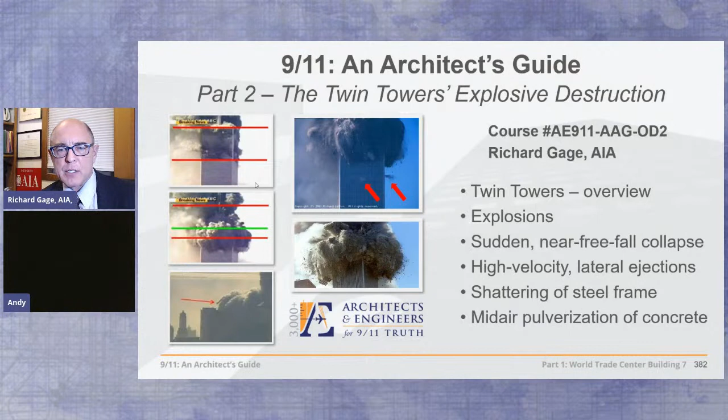So I hope you join us, because I want you to come back for part 2, coming up at 1 p.m. a week from today, Pacific time, where we go into the Twin Towers: the overview, the explosions, the sudden near free fall collapse, the high velocity lateral ejections, the shattering of the steel frame, the midair pulverization of concrete. The week after that, we get into the extreme heat associated with the Twin Towers, high-rise fires, what they can and can't do, pyroclastic-like clouds not from high-rise fires, molten steel and iron not from high-rise fires, iron microspheres, thermite and nanothermite not from high-rise fires, but capable of bringing these buildings down. We show you how that could be the only rational hypothesis—one that was, of course, never considered by NIST.